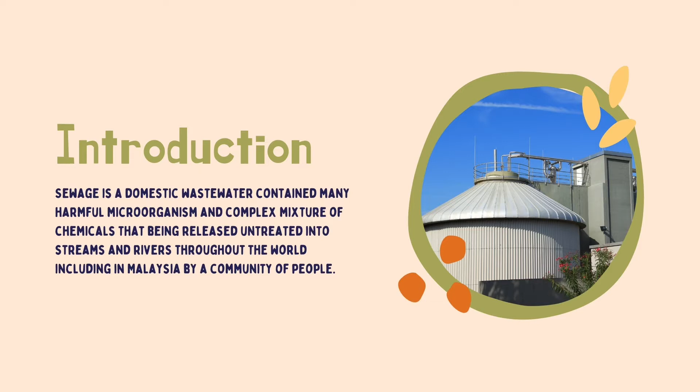However, the rate of sewage breakdown and associated oxygen consumption always exceed the rate of oxygen supply in rivers or streams. Therefore, the oxygen concentration in water drops and leads to extreme cases of oxygen deficiency, consequently loss or re-establishment of marine animals in those areas, production of harmful odor, and water becomes anoxic.

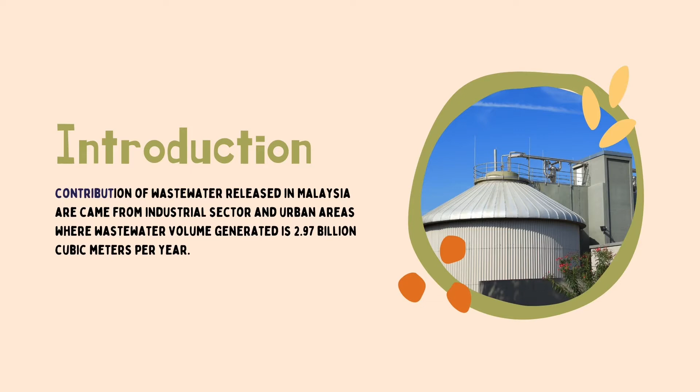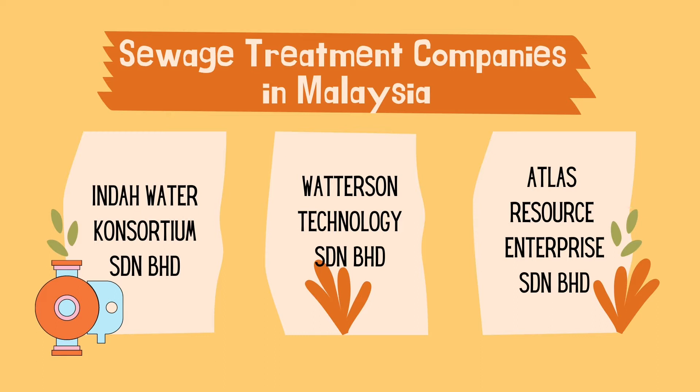All the potential risks can be essentially reduced by treatment procedures with improved techniques and mechanisms to reduce the pollutant level so that nature can speed up the natural wastewater treatment processes by which water is purified. There are several sewage wastewater treatment companies in Malaysia, such as Indah Water Konsortium Sdn Bhd, Watterson Technology Sdn Bhd, and Atlas Resource Enterprise Sdn Bhd.

Indah Water, known as IWK, is publicly known in Malaysia as it is a government-owned company under the Minister of Finance Incorporated, which is responsible for developing and maintaining a modern sewage system in West Malaysia efficiently. Its headquarters is located in Kuala Lumpur, whereas its plants are located in places like Petaling Jaya, Selayang, Batu Caves, and Bandar Tun Razak.

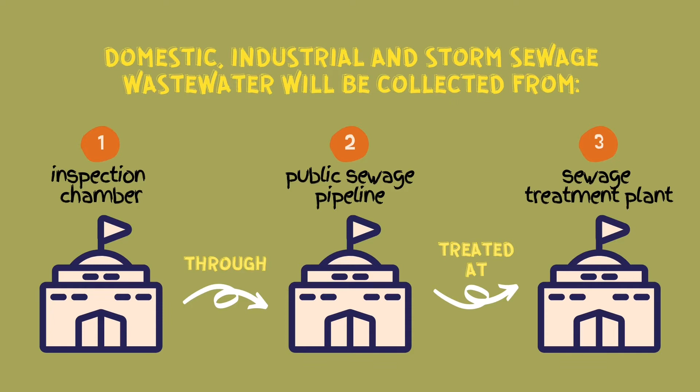Domestic, industrial, and storm sewage wastewater will be collected from the inspection chamber, which is generally installed at the property line of a building and allows the municipality or city to access the sanitary or storm sewers without disturbing the building owner. Then, the sewage wastewater will be funneled through the public sewerage pipeline, which connects the individual septic tanks to sewage treatment plants before it is treated there.

Now, let's move on to the analysis part. The contributing factors can be divided into external and internal factors. Under the external factors, firstly, the management is in authority to guarantee that the treatment plant is managed well so that good quality water is produced. After that, water treatment includes a lot of expenses to make it operate. Besides that, the operator needs mechanical aptitude and should be competent in basic mathematics, chemistry, and biology as well as computers. Last but not least, the workers must pay close attention to safety procedures as they may be confronted with hazardous conditions at the workplace.

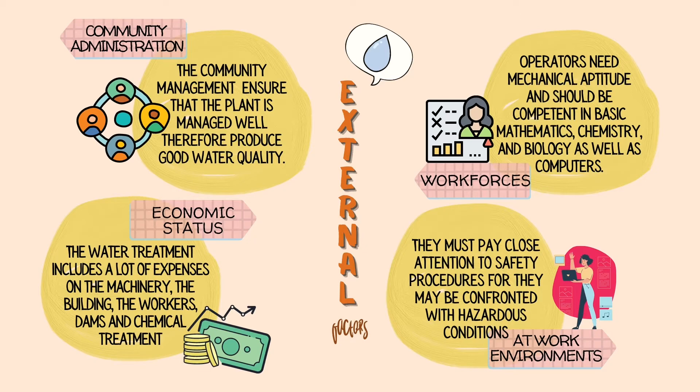While for the internal factors, firstly, the community of microorganisms should be adjusted so that the nitrogen and phosphorus are enough and metabolism failure as well as slime don't occur. Next, the performance is greater at higher temperature due to the higher reaction rate coefficient, while the optimum pH should be between 7 and 7.5 as the bacteria are helped by the enzymes. In addition, the inflow of effluent should be stabilized so that the treatment process downstream remains functional. Finally, the toxic effluent can be diminished by diluting it in equalization ponds with the help of effluent that is composed of lesser toxins.

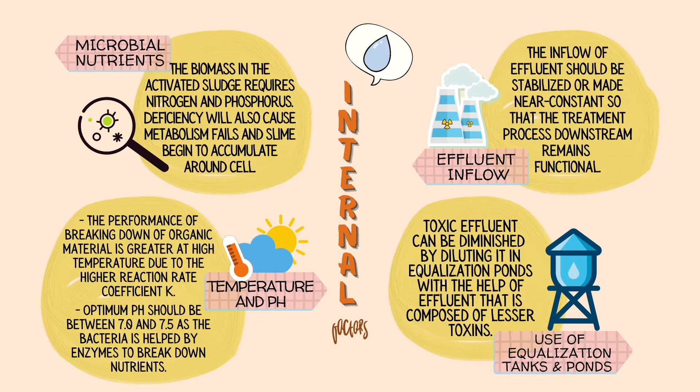There are three basic concepts in a sewage treatment plant. Firstly, the water stays till scum has floated to the top and solids have settled at the bottom of the tank. The second chamber circulates air around the chamber and bacteria aid to break down the contaminants in the water, efficiently scrubbing it. The final tank allows solids that may remain to sink to the bottom of the tank before the effluent is cleared into a soakaway.

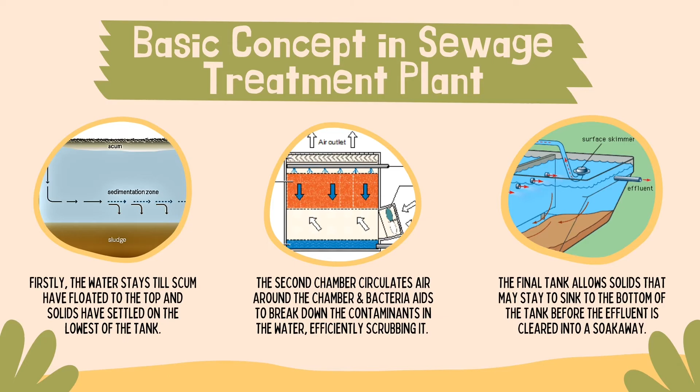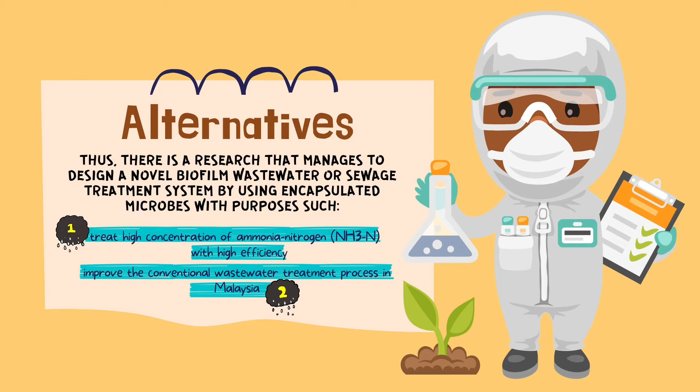The next part will be the alternative of treating sewage or wastewater in Malaysia. There is a study conducted by a few researchers in 2019 where they managed to design a novel biofilm wastewater system by using encapsulated microbes, known as MBS. This system is designed to treat high concentrations of ammonia nitrogen and improve the conventional wastewater treatment process in Malaysia. There are three main stages in this system.

The first stage is called primary treatment. This part consists of a transverse pump sump and micro belt filter. This is an essential part because it's designed to eliminate grit, sand, and different types of foreign solid substances that are often found in raw wastewater.

The second stage is the secondary treatment system, where we can find two important units, which are BioAX1 and MBS1. Basically, the function of BioAX1 is to remove chemical oxygen demand, biochemical oxygen demand, and also ammonia nitrogen in a shorter time because it contains a fixed, suspended filter and a microporous aeration system. Besides, MBS1 contains pellets with the main component of microbial liquid to make sure the nitrification process occurs and converts ammonia to nitrite and then to nitrate.

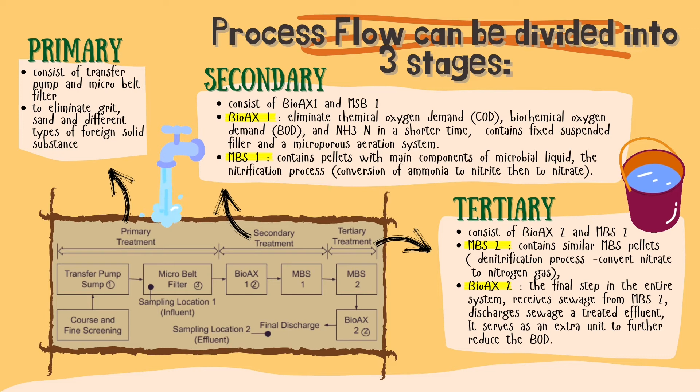The last stage will be the tertiary wastewater system, which is the key unit to enhance the biodegradation rate for organic matter removal. In this treatment process, it has MBS2, which also possesses MBS pellets, but this time it is used to undergo the denitrification process by converting nitrate from the previous MBS1 to nitrogen gas. The final step in the entire system is BioAX2. This unit will receive sewage from MBS and discharge it as a treated effluent. It serves as an extra unit to further reduce the BOD, biochemical oxygen demand.

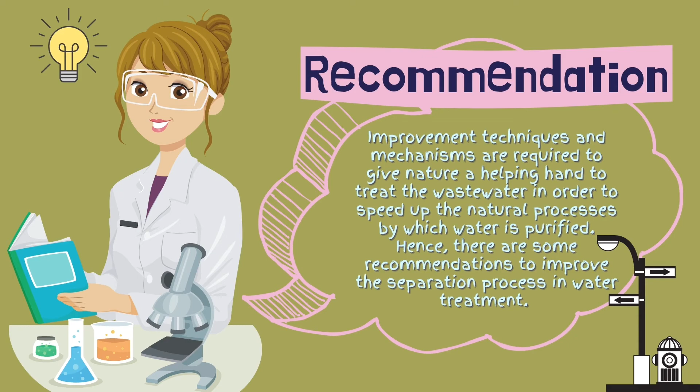Here are some recommendations for wastewater treatment. Improvement techniques and mechanisms are required to give nature a helping hand to treat the wastewater in order to speed up the natural processes by which water is purified. Hence, there are some recommendations to improve the separation process in water treatment. The first recommendation, where sedimentation first takes place, in which the adsorption of solved components occurs by recycling through the precipitation of excess sludge. Number 2, zeta potential measurement will help to obtain a better understanding of the processes affecting the properties of sludge.

Number 3, new efficient adsorbents must be developed as they can be reused for a cost-effective separation process. Nowadays, many researchers have widely studied adsorbents for water treatment and purification. This is due to adsorptive separation being very effective to obtain a high degree of purity. Number 4, final treated water should be treated frequently due to the purpose of using it for secondary intent. This is very significant for human health and the environment.

For the last, awareness campaigns to change public attitudes, behaviors and expectations should be done. For example, educate people about the effect of throwing rubbish in the toilet bowl and avoid doing activities that can contribute to water pollution, as treatment of raw water becomes more complex and costly because of water pollution.

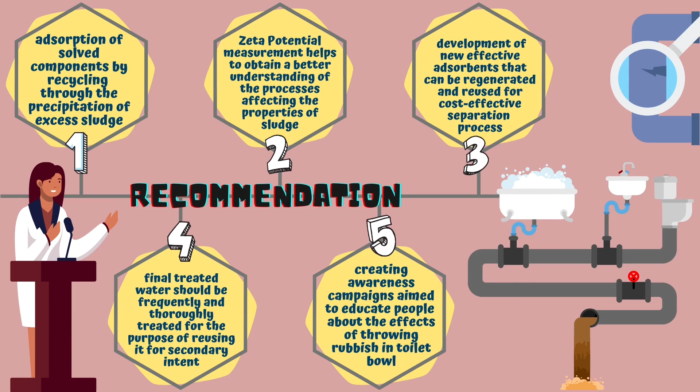Conclusion: wastewater treatment is an important thing to pay attention to because human beings need water to stay alive. Various factors need to be considered in treating wastewater. Only when the conditions are met could treating wastewater produce safe and healthy water for the public.